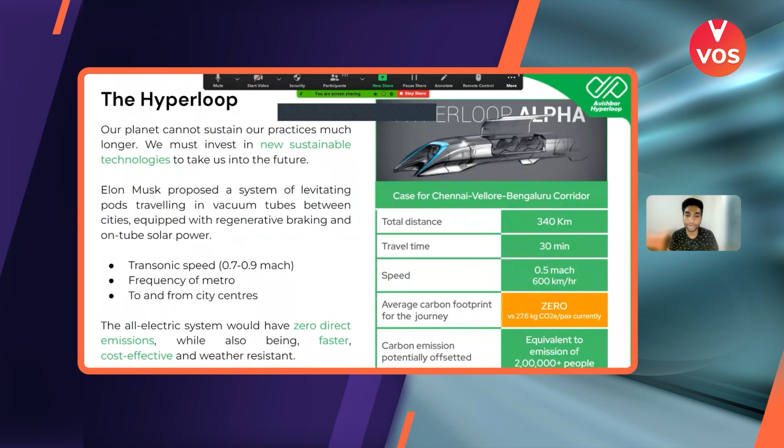Let us first understand the motivation and the concept behind Hyperloop. People throughout the world have started to realize the importance of sustainable technologies, and with that emerged the concept of Hyperloop. As mentioned before, Elon Musk first proposed the concept of a system of levitating pods traveling in vacuum tubes between cities, equipped with regenerative braking and on-tube solar power. He termed this prototype Hyperloop Alpha. One interesting fact is that he wanted student teams to work upon this concept and build upon it.

Hyperloop, being an all-electric system, has zero direct carbon emissions while also being faster, cost-effective, and weather-resistant.

Here is a table from a case study our team worked upon with basic estimate practices for the Chennai-Bangalore Hyperloop corridor. As per our calculations, the travel time for the journey came out to be almost around 30 minutes. One key thing to note is that the average carbon footprint for the journey comes out to be nil, versus 27.6 kg of carbon dioxide equivalents per passenger, which is the average of other modes of transportation. With that, we can offset an emission equivalent to almost that produced by more than 2 lakh people. Doesn't it sound amazing?

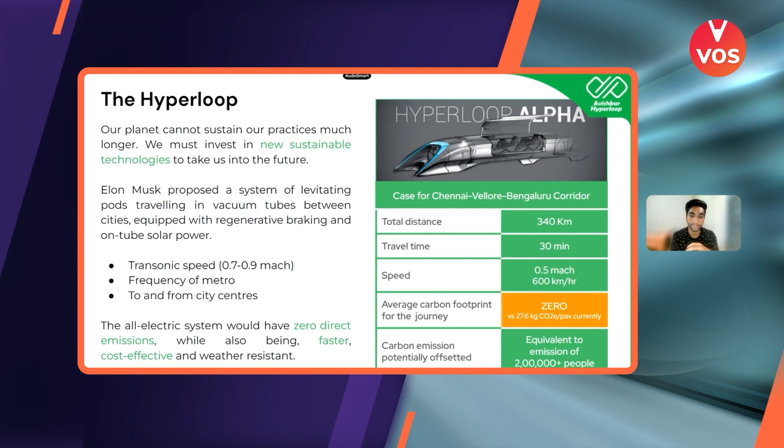There are mainly two types of scalable Hyperloop pods, namely passenger and freight Hyperloop. As the name suggests, a passenger Hyperloop will connect people and bring the world closer by drastically reducing travel time between two cities or even two countries. Another secondary benefit of introducing passenger Hyperloop will be increased employment opportunities, as it will enable people to move out of their own city for job opportunities.

The other type is freight Hyperloop. This will have the same system as the passenger Hyperloop, except for the interior and the safety protocols. It will also drastically reduce delivery time and make business more profitable by increasing the efficiency of the supply chain. As research progresses, the pods will have a higher capacity to hold freight and will also account for higher freight demands in future.

Any other technologies you think would be useful for the scalable Hyperloop? Magnetic levitation is one place where you levitate - what else do you need? Akshat, any idea, you were raising your hand, would you like to answer? Magnetism and vacuum - vacuum, yeah, that's true.

Vacuum is needed because if you take a normal train, you have a lot of air drag. So if you produce vacuum, you won't have that much air drag. Okay, fine, you don't have a lot of air, but you want something to move it, right? Yes. So what else do you use for that?

I wanted to ask a question - are there any current projects going on in India overall for Hyperloops, meaning are they going to be built sooner? Could you repeat again? Pardon me, are there any projects going on in India based on Hyperloops, like building on a large scale?

You'll get to know our plans, and maybe by the end of the session your answer will be answered. We will talk about it in the upcoming slides.

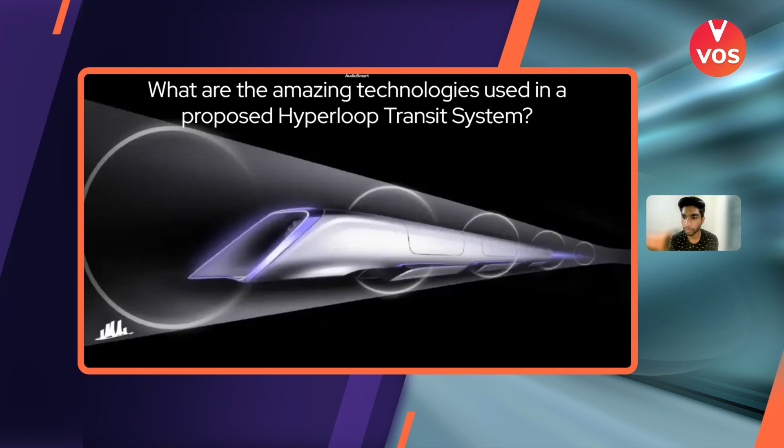Any other answers? So one is vacuum. Okay, yeah, that's the right answer. I guess we can move on and start to explain about the subsystems.

So the first up is propulsion. Propulsion in a Hyperloop can be achieved mainly in 2 ways: one is the conventional wheeled approach, in which you use an induction motor or a BLDC motor, and the other is a more fresh approach, that is magnetic propulsion.

This is again based on the laws of electromagnetism. We use what is called a linear induction motor. Basically you take a rotary induction motor, cut it along its radius, stretch it out, and you get a linear induction motor. So unlike a rotary induction motor where you have a rotating magnetic field...

Next up is levitation. Levitation in Hyperloop is mainly by the laws of electromagnetism, but there can be many various technologies used, like electrodynamic wheel, circular induction motor, or using permanent magnets in a particular arrangement. As a team, we have tried all these setups, but all of these are only in the prototype stage - none of them have been integrated into the pod as of yet.

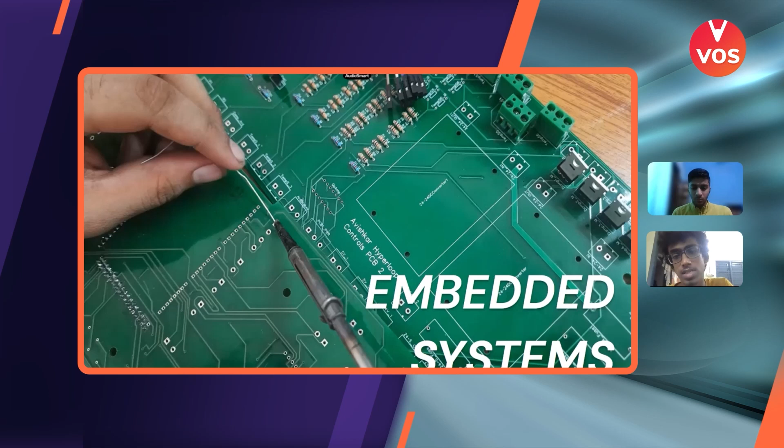So a few components like the linear induction motor, that is the propulsion stage, would need AC current, whereas a few components, like the embedded systems which we'll talk about further, would need direct DC current. These embedded systems are the brains of the pod - they control every aspect, every movement of each pod, each component of the pod.

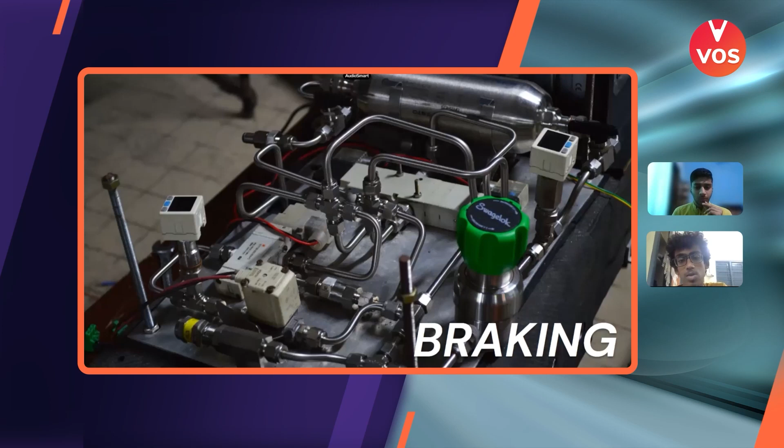So the next step is braking. Elon Musk wanted the Hyperloop concept to be completely contactless. Braking is one aspect where many other transportation industries, such as the automotive industry, use frictional or contact braking, not contactless braking. So we aspire to use contactless braking here.

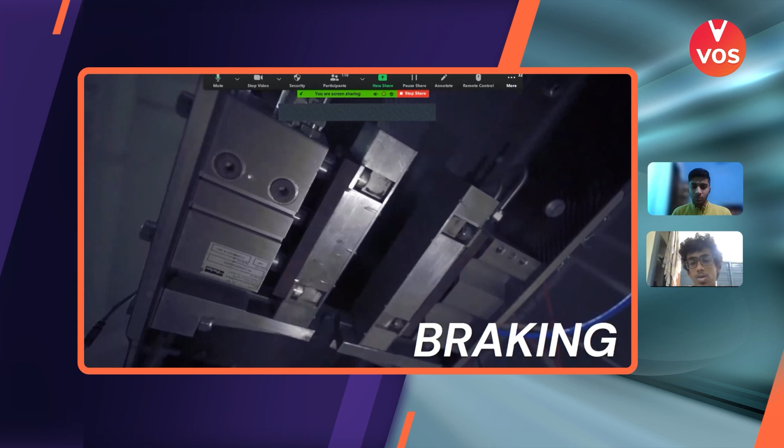What we do is, using the same concept of electromagnetism, we use eddy currents which will produce a magnetic field in the track, which will repel the other magnetic field, and hence lead to drag for the pod, causing it to stop. The 2 advantages of this braking are that it leads to much less frictional heat produced, and also much less wear of the braking component itself, and overall efficiency is increased.

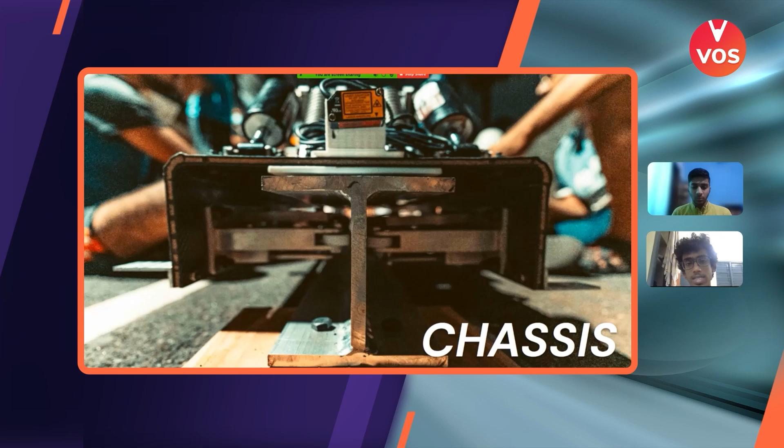The next up is chassis. The chassis is where all the components of the pod sit in, and the chassis team is responsible for making that and taking care of the proper stresses and strains for the chassis. This chassis we produce is our latest creation, the 2021 pod - it is in the shape of the letter C, and it is made out of carbon fiber.

The next up is aerodynamics. Now, you might wonder, in the Hyperloop concept the pod is supposed to traverse in a vacuum tube, so what is the point of aerodynamics? What is the point of an aerodynamics team? Ideally a vacuum tube will have no air in it, but if you think about it, especially in the 340 kilometer Chennai Bangalore Hyperloop corridor, which we spoke about in the starting few slides, it is practically impossible to remove all the air in it.

There will be some amount of residual air present in the tube. So to counteract that air and make the best possible design, reducing the amount of drag even in that residual air inside the vacuum tube, is the aerodynamics subsystem's job. Also, the Hyperloop concept is supposed to travel at speeds of about Mach 1, approaching the speed of sound, and air behaves differently at those speeds. So the aerodynamics team must also factor in that aspect of air characteristics.

The next stop is suspension. The suspension team is responsible for guiding the pod along the track and counteracting any bumps the pod experiences, providing a smooth and safe ride.

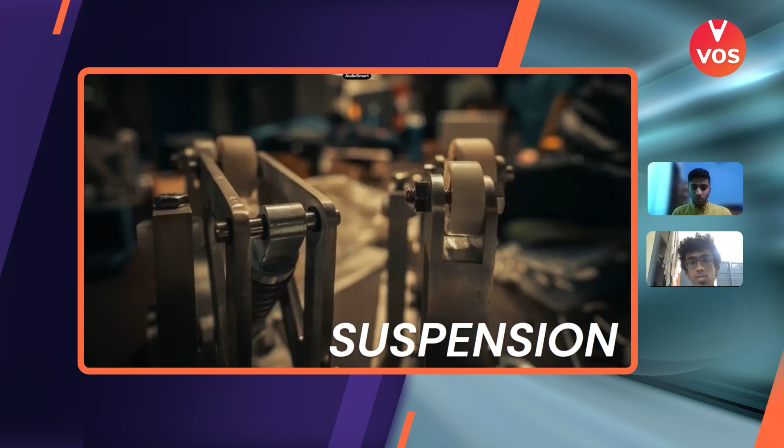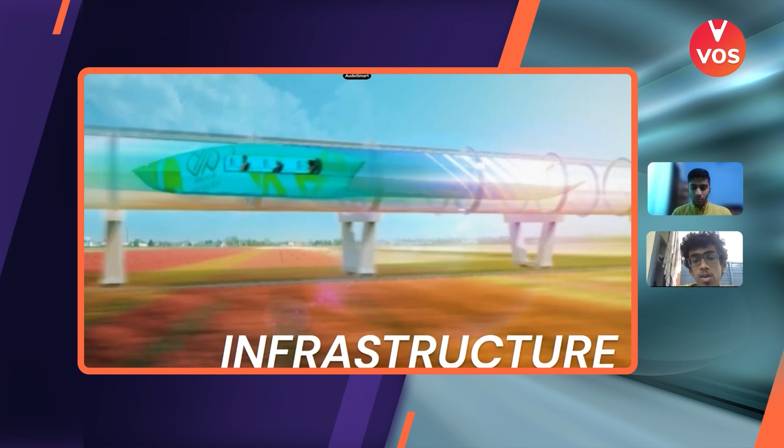Next up is infrastructure. The infrastructure subsystem is a fairly new team in our setup. The Hyperloop concept involves two technologies: the pod and the tube. The tube part is something we haven't focused on up till now, so in this tenure, in 2022, the infrastructure subsystem will take care of all tube-related problems.

The last but not the least is the business subsystem. The business subsystem takes care of outreach events like this one to inculcate enthusiasm about Hyperloop around India and the globe, and conducts and publishes economic case studies of mainly Indian cities, like the Chennai-Bangalore case study you saw in the starting slides.

The other role is finding sponsorship. We are a completely student-run team. All decisions, designs, and manufacturing are done by students, so we do not have any income as such. We mainly rely on our sponsors' funds to fuel our ambitions.

Summing up all these individual components, this is the overall pod. You can see the front view and the bottom view. Here is the semi-active suspension, made by the suspension subsystem.

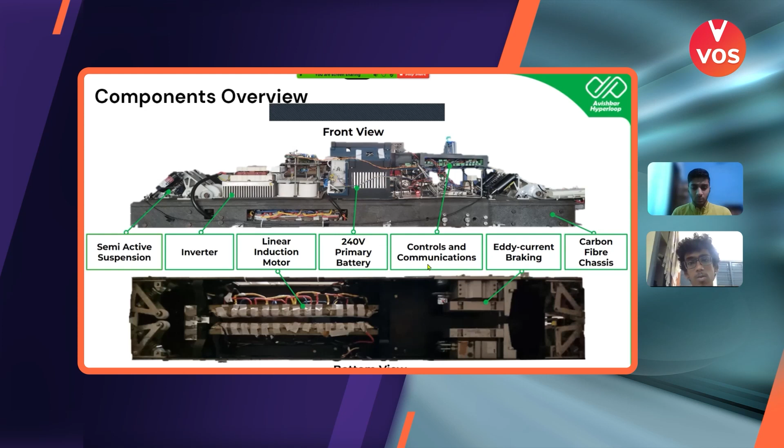Next up is the inverter, which converts DC to AC, and then the linear induction motor, which is the propulsion subsystem. The linear induction motors require AC, which is why we use an inverter to convert the primary battery's DC current. The controls and communication system requires DC current, so we connect it directly to the battery.

That is our pod run, which we completed after a lot of hard work, amidst the pandemic. While the country was ravaged with lockdowns, we were there working with complete COVID protocols being followed.

The total distance the pod traveled was about 35 meters, mainly because of the track length constraint we had, which was only 35 meters. But we achieved a very high acceleration, about 0.5 G, which is quite appreciable and impressive.

Our future plan for the pod aspect of Hyperloop, the 2022 pod, is to use lessons learned from the 2019 pod and the 2021 pod. The 2019 pod was selected for SpaceX and we were eventually acknowledged by Elon Musk, which gave us immense determination that it's possible to bring the Hyperloop concept into India. It was an extraordinary achievement, but technically there weren't many novel technologies involved—it used pre-existing, well-established technologies.

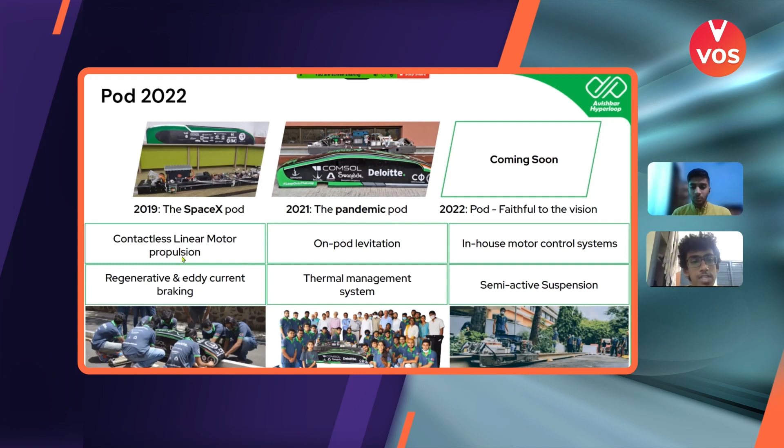So what I'd like to say is that the Hyperloop consists of the pod and the tube. Up until now we have only spoken of the pod aspect of it, so now let me talk about the tube aspect. Our biggest reveal, I think someone pointed it out, is to bring the Hyperloop concept to India in reality and bring in a major project in India. So this is one step towards it, and you'll understand why after you watch this video.

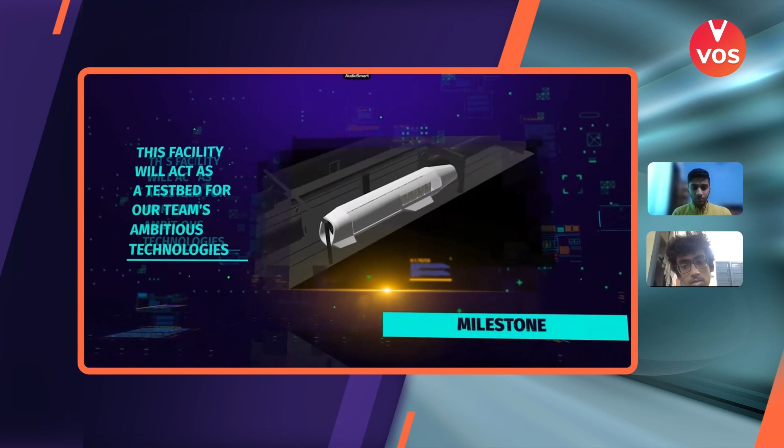One of the main questions I was seeing is that people are confused about whether it produces renewable energy, or what's the energy aspect to this. Some people in the chat also pointed out that this is a transportation vehicle, so obviously it will use energy. So how are we saying that it is a renewable transport or a zero carbon emission mode of transportation? Since Hyperloop is using electrical energy, what we are aiming to do is...

Above all of the tube infrastructure that we have, we'll try to lay out solar panels. According to our preliminary studies, we are confident that this solar panel system will be able to produce more than enough energy to power this Hyperloop transportation system. And in some cases it might also produce extra energy, which we can supply back to the government or to other energy companies.

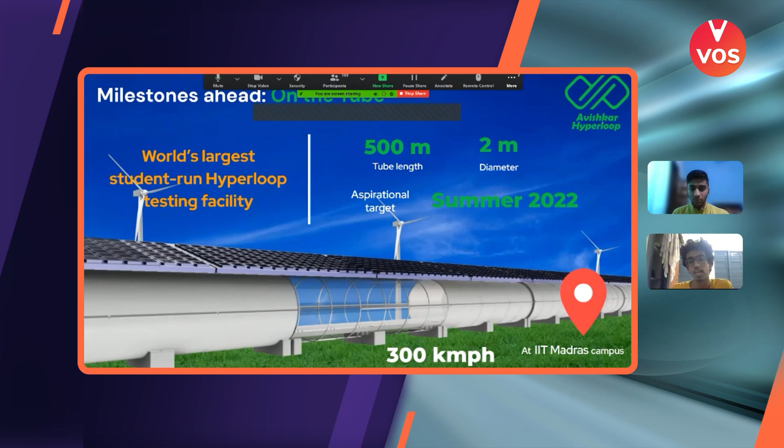Now this tube is made completely by an infrastructure subsystem in Team Avishkar. It's completely designed, validated, verified, and tested — everything is done by the students themselves. So we need some sort of mechanism to test whether our design would actually be good for the 500-meter long tube. To test whether our designs are acceptable and feasible for that length, we have built a 3.6-meter long vacuum tube, which is currently sitting here in IIT Madras.

This is the 3.6 meter long tube, which was inaugurated by Mr. Pawan Goenka, chairman of InSpace. This prototype was mainly made to test a few parameters like temperature, pressure, buckling strength, stress, and strains involved in the vacuum tube when vacuum is put into it. It achieved a low pressure of about 1 mm of Hg, which is only about 100 pascals, about 1/1000th of the pressure of the air around us.

So 1/1000th of 1 atm. This pressure is the amount of pressure at an altitude of about 50 kilometers, so you could say it's bringing air travel down to Earth. That is how high the achievement by this tube is, the amount of vacuum reached is very good, plausible.

Another thing we learned was the manufacturing capabilities. We already had an idea of it, but now we have a much more clear idea as to how to go about building the 500-meter long vacuum tube.

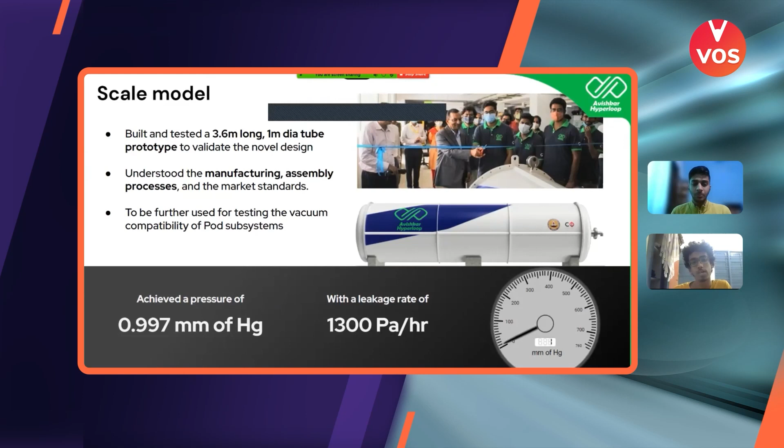This session was aimed at students, and before we discuss further, let's answer some of the doubts in the chat. I have already answered the energy question, that we'll be using renewable energy, using solar panels.

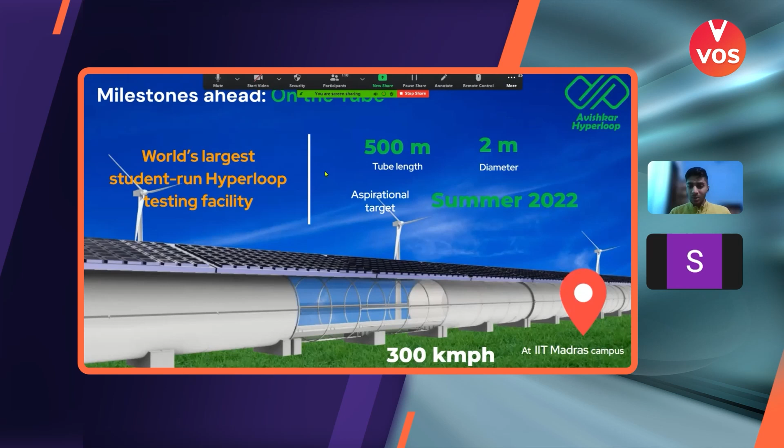Is it faster than a jet aeroplane? I won't say it's faster than a jet aeroplane, but I think it is comparable to a normal passenger airplane used for domestic flights. Ideally, when it is fully functional, we are aiming for a speed of around 600 kmph.

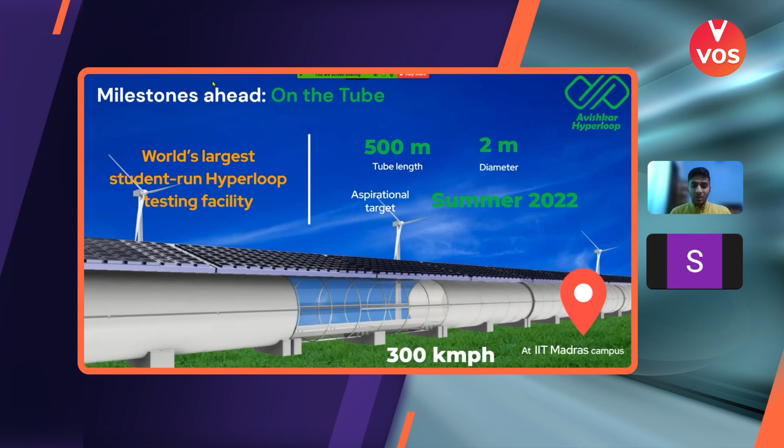Someone is asking, will we have stops between the stations? One thought on this is that, for example, if you take the case of Chennai to Bangalore, this route is going to take roughly around half an hour. So if we have stops in between, like a normal passenger railway, it doesn't make sense to have a lot of stops in Hyperloop because we are already traveling at a very high speed, and if we have stops, it's going to make it very useless, causing a lot of time wastage. So we are planning to accommodate one stop in between, which could be like an added junction. For example, in Vellore, there is a possibility.

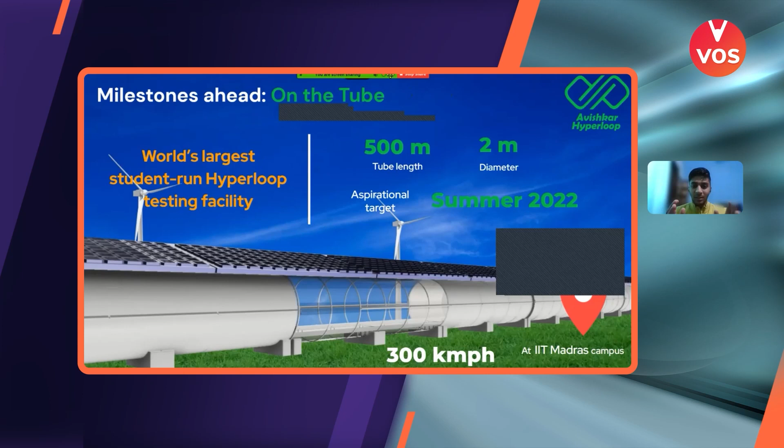How will people enter and exit the vacuum sealed pod? This is actually a very good question. There are a lot of discussions going on around the world, and many people have given several different kinds of solutions to this. This is actually an open-ended question for you guys too, you can also think upon this. What we have come up with so far is that we can use a vestibule system kind of thing. If you've seen some space movies like Interstellar or Gravity, you might have seen a small chamber in between the space station and space, where if you enter, you lock yourself in, there is a change in pressure, and then you go to the other side. We are planning to do a similar thing: when passengers enter the pod, it is enclosed in a closed chamber and the pressure is dropped before it's opened to the tube. Similarly, while coming out, the pressure is increased again and they're taken out of the tube.

Can it take turns or only straight paths? This is also a very good question. Since we are traveling at very high speeds, it is obviously very difficult to travel on anything but a straight path. We are trying to find ways to accommodate turns at very high speeds, but it's going to be very difficult, so it's majorly going to be a straight path only.